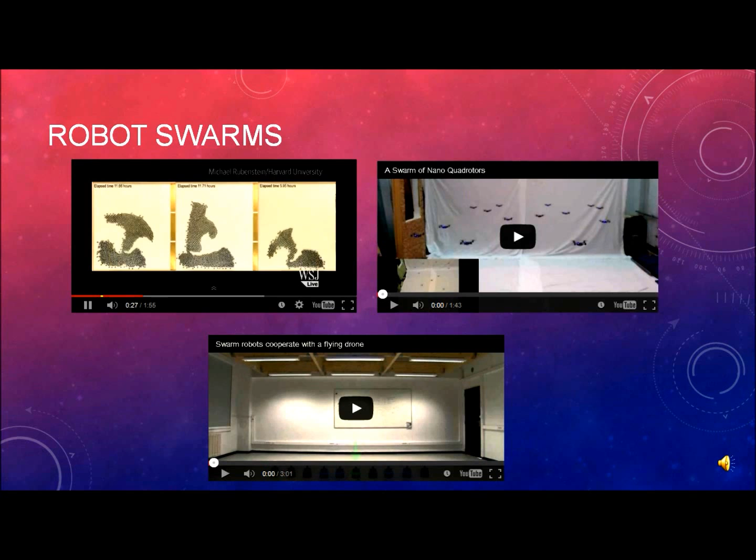Working together, these robots can assemble themselves into stars, letters of the alphabet, and other complex designs. The researchers at Harvard's Wyss Institute for Biologically Inspired Engineering reported their work Thursday in Science. It is the latest innovation in the science of swarms.

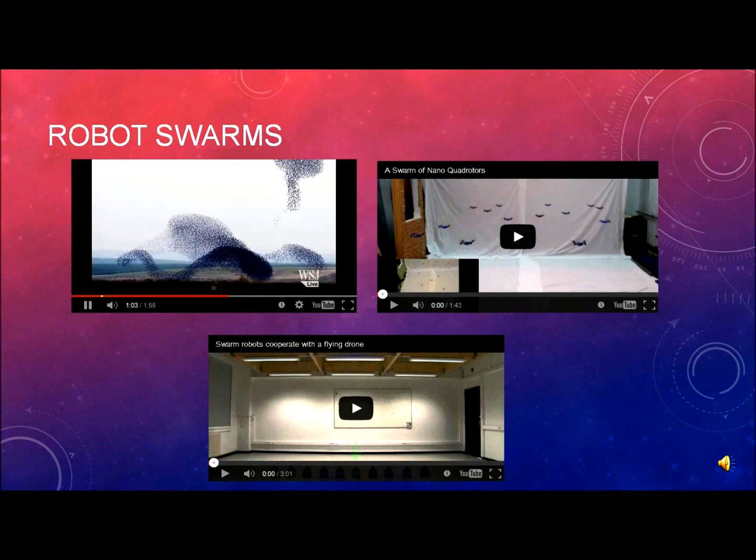Swarm scientists are inspired by nature's team players: social insects like bees, ants, and termites, schools of fish, and flocks of birds. These creatures all collaborate in vast numbers to perform complicated tasks, even though no one of them is actually in charge. To give robots that kind of hive intelligence, the researchers resorted to fundamental guidelines encoded in software to guide the collective behavior.

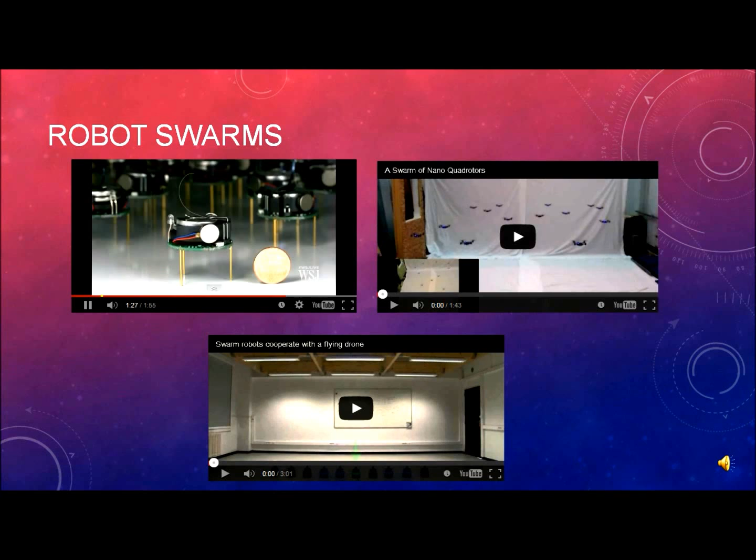In the Harvard experiment, the researchers used inexpensive, off-the-shelf robots called kilobots. Each one is about the diameter of a penny. It has one infrared sensor and a simple vibration motor to move it along. Each of these robots knows three things: how to follow the edge of a group, how to track its distance from where it has started, and how to maintain a sense of its relative position.

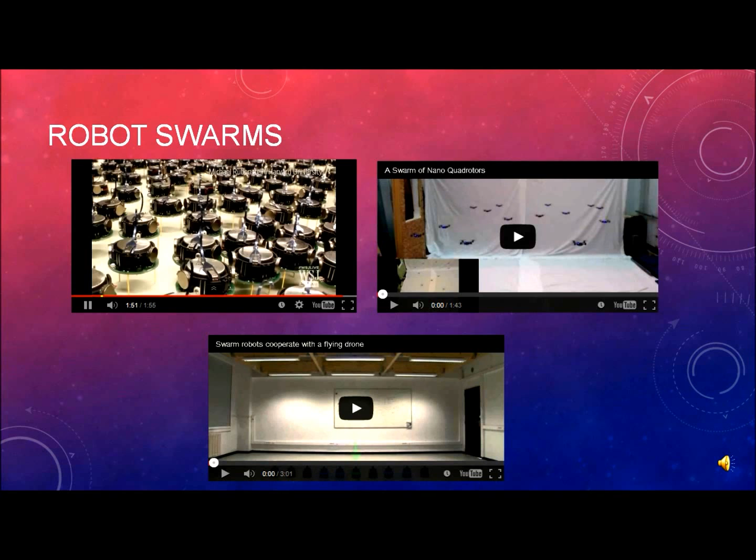While still experimental, such big robot swarms one day may aid in oil spill cleanups, deep-sea ventures, military surveillance, and planetary exploration.

We developed a nano-quadrotor capable of agile flight.

Multiple vehicles can fly as a formation.

We developed a method to transition between formations in 3D.

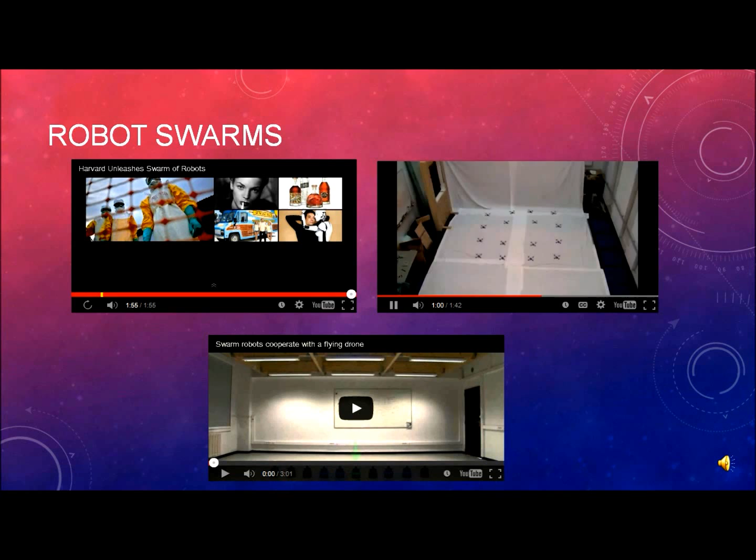The team can also navigate in environments with obstacles.

A recent trend in robotics is to get lots of robots working together. But parallel operation is not always enough. Some tasks are just too difficult for the robots to solve on their own.

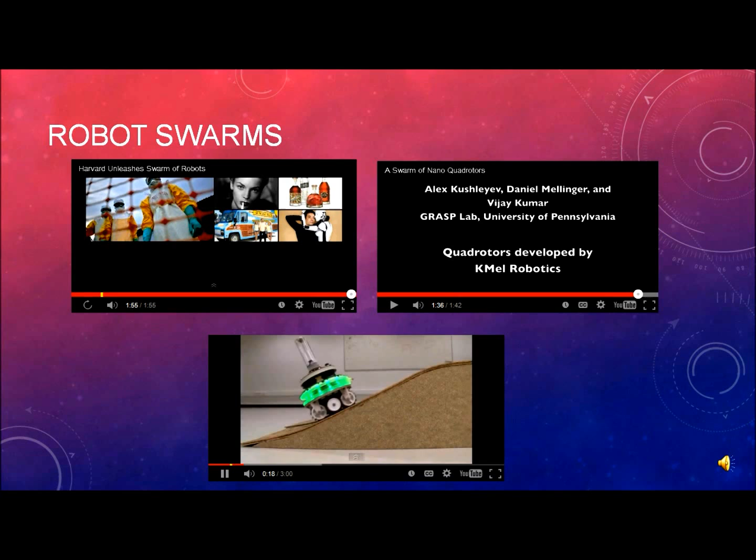So-called self-assembling robots can combine forces by connecting to each other in a broad range of morphologies. But it's hard for the robots to know when to use different morphologies because of their limited local sensing range. The solution? Flying robots.

Flying robots can analyse the environment to see what task needs to be solved, what morphology is most appropriate to solve that task, and which robots are best placed to form the morphology.

However, it is non-trivial for the flying robot to communicate with specific robots on the ground. The problem is that the robots have very different views of the world, which makes it difficult for them to agree on a common frame of reference.

We have developed a method that allows robots to select their communication partners without relying on any kind of global coordinate system. We refer to our method as spatially targeted communication.

Let's say a flying robot wants to communicate with a specific robot on the ground—this one, for instance. To start the selection process, the flying robot illuminates its red LEDs. To join the selection process, the robots on the ground light up in blue.

In a series of elimination steps, each ground-based robot independently displays a sequence of randomly selected colours. At each step, the flying robot matches the colour of the target robot. Whenever a robot on the ground sees that its own colour doesn't match the flying robot's colour, it eliminates itself. The process continues until only the targeted robot is left.

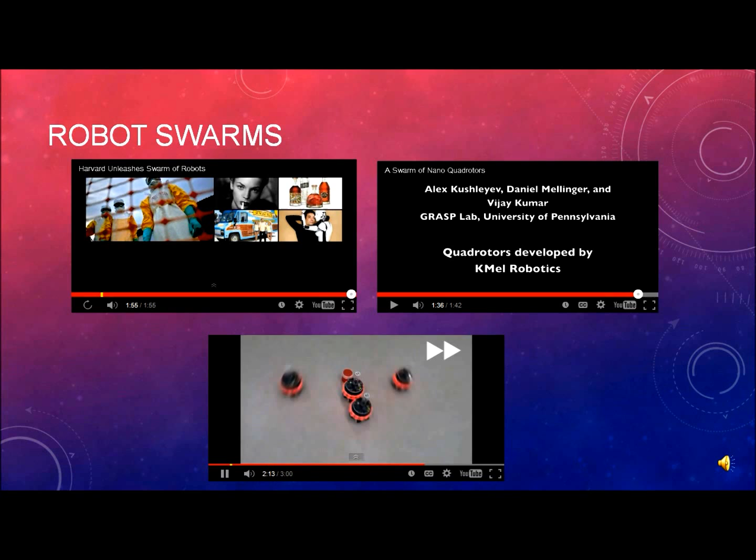Here, the flying robot has already targeted the 4 robots closest to the hill and instructed them to form a line morphology.

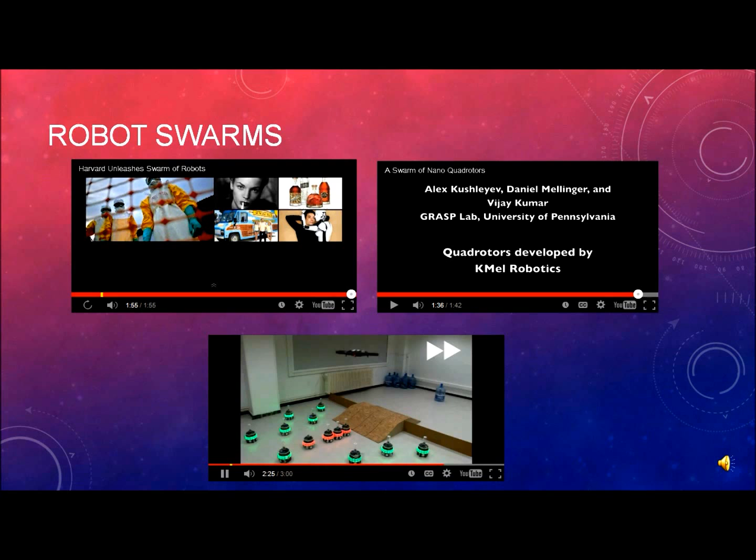Spatially targeted communication expands the potential of self-assembling systems by allowing ground-based robots to benefit from cooperation with flying robots. Any robotic platform equipped with LEDs and a standard camera can participate in spatially targeted communication. Our current focus is on bringing our research out of the laboratory and into the real world.

In the following example will be a demonstration of telerobotic surgery using an existing industrial-strength robotic manipulator. Within the area of telerobotic surgery, many applications are possible, both for performing via a very skilled surgeon and thousands of miles between the operating table and the surgeon.

Procedures within the area of orthopedic surgery, as an example, and there are also new emerging applications within the battlefield, where skilled doctors would be staying hundreds if not thousands of miles away from the battlefield, and actual robots with the appropriate sensors, manipulators, and end effectors are performing via telerobotics using the skilled surgeons' techniques, surgeries on wounded soldiers, as an example.

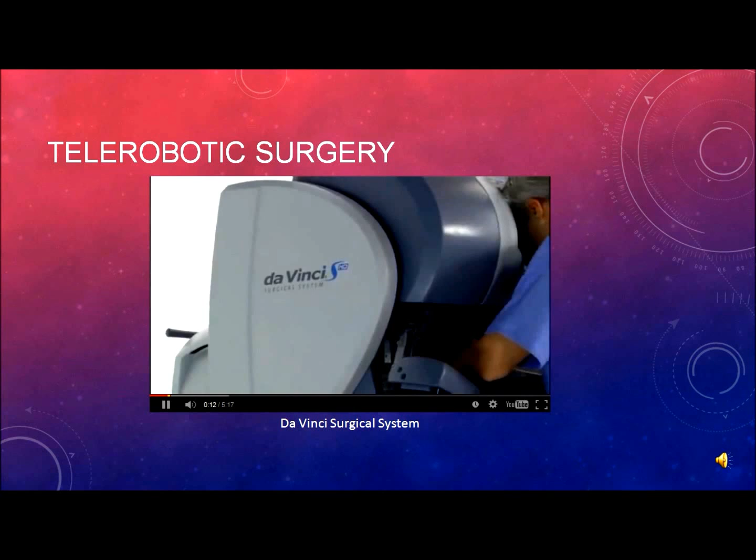The Da Vinci surgical system is the most advanced platform for minimally invasive surgery available in the world today. The integration of high-resolution 3D vision, wristed instruments, and intuitive motion control enable the Da Vinci surgeon to transcend the limitations of conventional surgical technologies, making new minimally invasive options possible for complex surgical procedures.

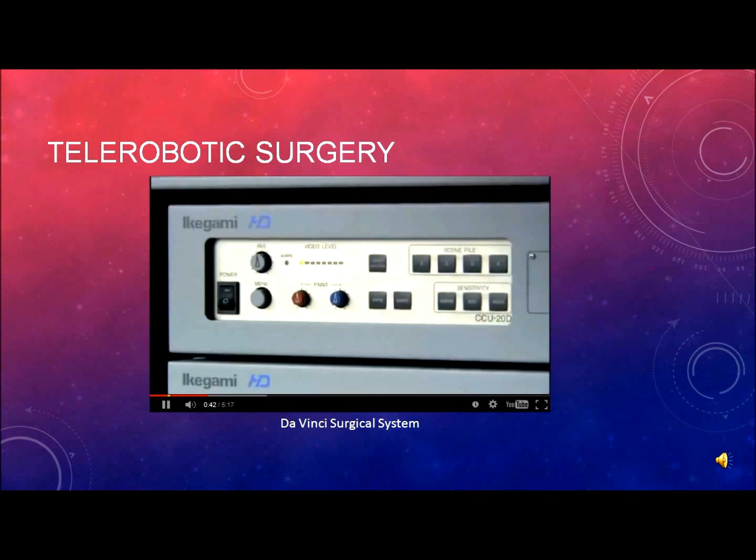Three network components comprise the Da Vinci surgical system: an ergonomic surgeon's console, a patient-side cart with 4 interactive robotic arms, and a high-definition 3D vision system.

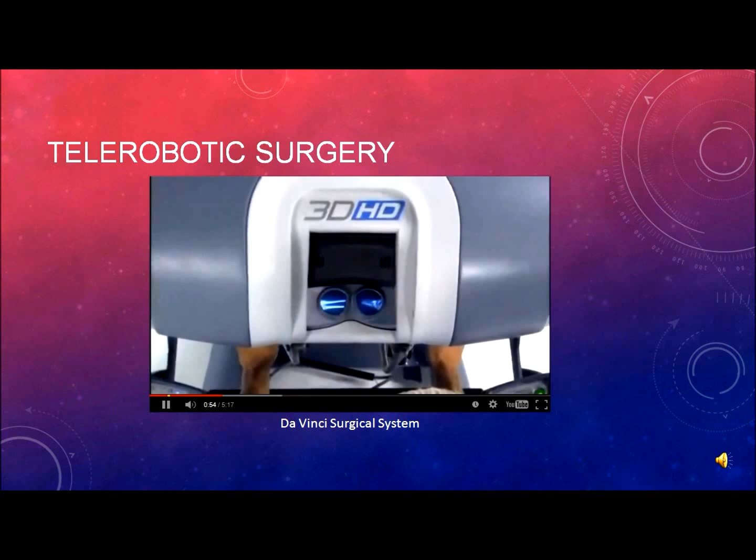Seated at the console, the Da Vinci surgeon views a remarkably clear 3D image of the surgical field. The system scales, filters, and translates the movements of the surgeon's hands on the master controllers to 4 interactive robotic arms on the patient cart.

The DaVinci S HD system provides a magnified view that is both three-dimensional and high definition. The result is a phenomenal immersive experience of surgery.

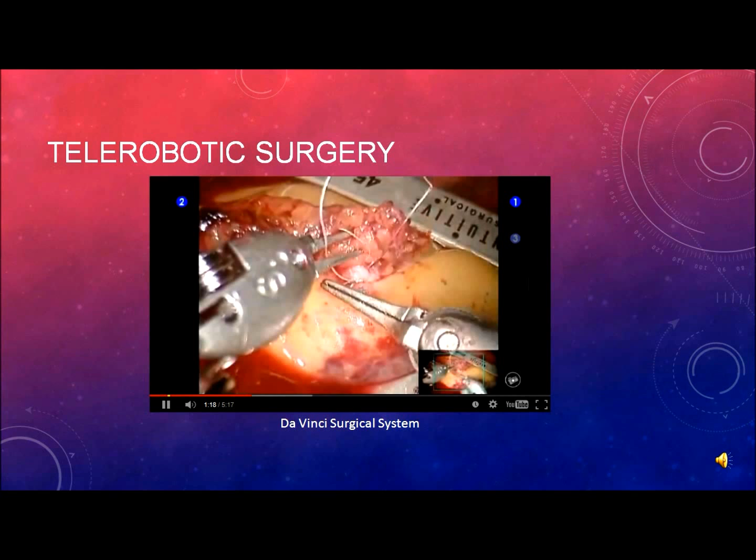The precisely controlled micro-movements of the DaVinci instruments are enabled by the computer processors of the system. These dedicated processors perform millions of safety checks over the course of a procedure for enhanced surgical precision and control.

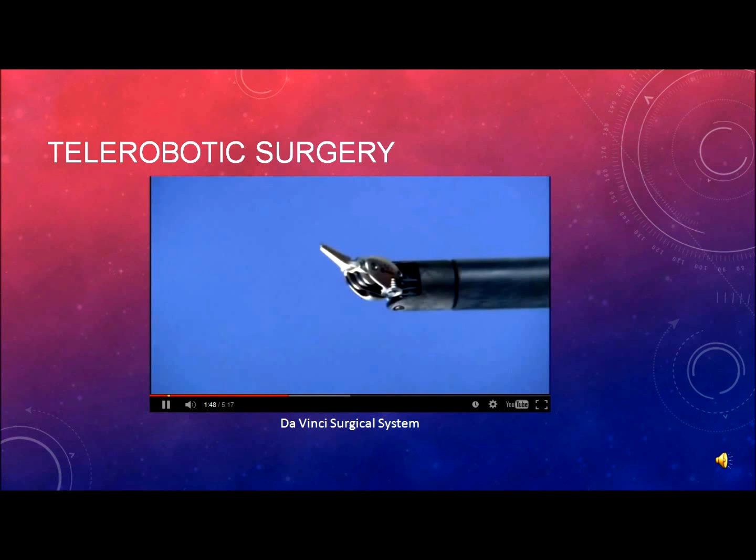DaVinci EndoWrist instruments are designed with a unique wristed architecture that provides 7 degrees of freedom for a range of motion greater than even the human wrist. This proprietary design enables surgical maneuvers impossible with conventional laparoscopic tools.

As the surgeon operates at the console, the DaVinci system filters out hand tremor and translates his controlling motions to the articulating tips of the EndoWrist instruments. The DaVinci system also provides motion scaling that enables the surgeon to tailor the ratio of his hand movements to a corresponding micro movement at the instrument tip.

The system requires that every surgical maneuver is under the direct control of the surgeon. Redundant safety checks prevent autonomous movement of the instruments or the robotic arms.

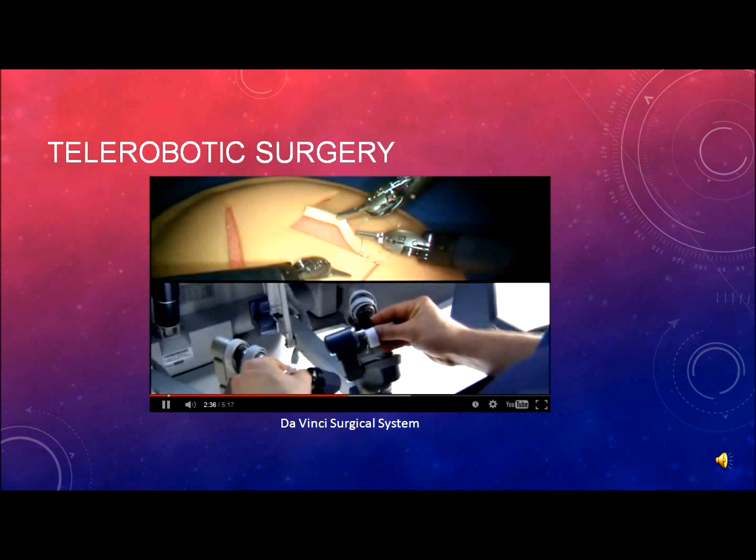The DaVinci S surgical system adds to the enabling characteristics of the original DaVinci to streamline surgery for the entire OR team. DaVinci S provides fast, foolproof setup, including a motorized patient cart for simplified docking, simple click-lock cannulas, rapid instrument exchange, and an intuitive touchscreen interface.

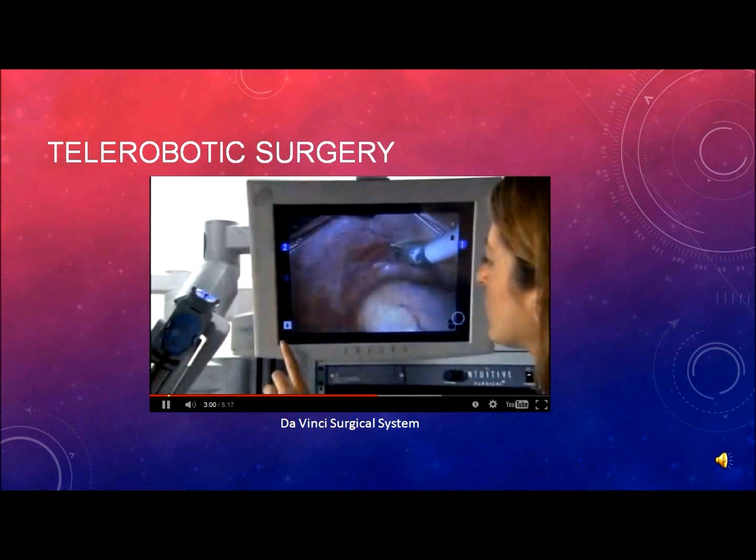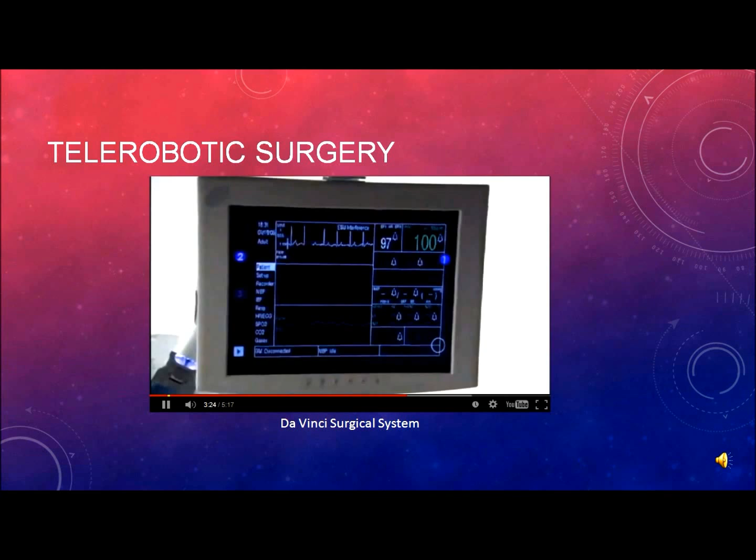Intraoperative communication between the entire OR team is enhanced with the audio-visual components of the system. The internal view of the operative field is visible on the vision cart or optional patient cart monitor. These monitors can also be toggled to display patient-critical information or a tiled display with multiple windows.

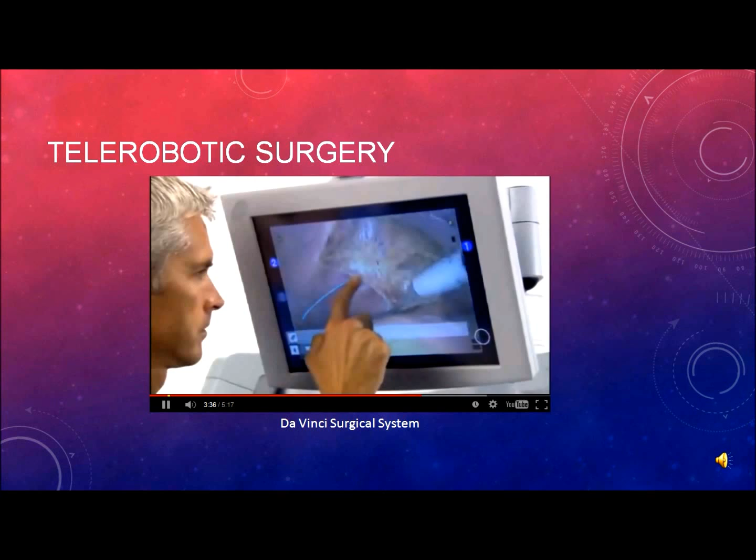Proctoring is enhanced with the telestration capability. Notations drawn on the patient cart monitor can be seen by the surgeon as an overlay on the surgical view at the console. The 2-channel endoscopic cameras of DaVinci S HD enable better 3D visualization of tissue planes and critical anatomy. The result is increased surgeon confidence and an environment that lends itself to greater surgical precision.

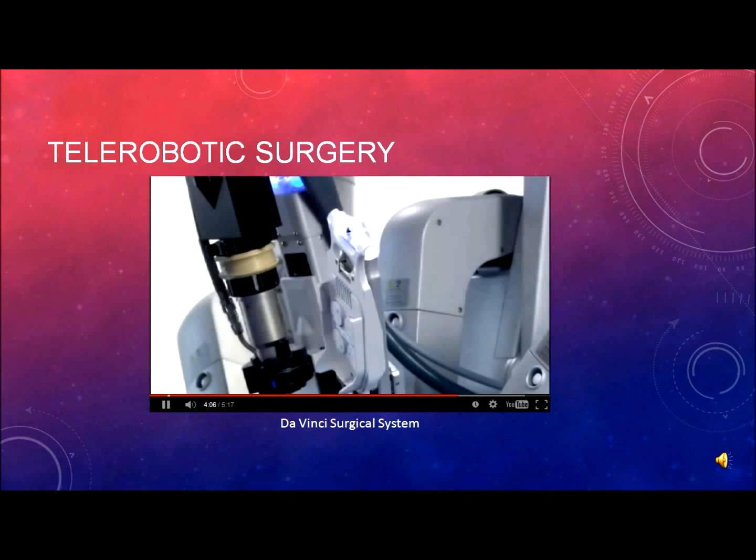LEDs that indicate status on each robotic arm, along with the user-friendly design of EndoWrist instruments, make intraoperative instrument exchange simple.

Like conventional laparoscopic surgery, the robotic arms move around a fixed pivot point to reduce port site trauma for improved cosmesis and increased overall precision.

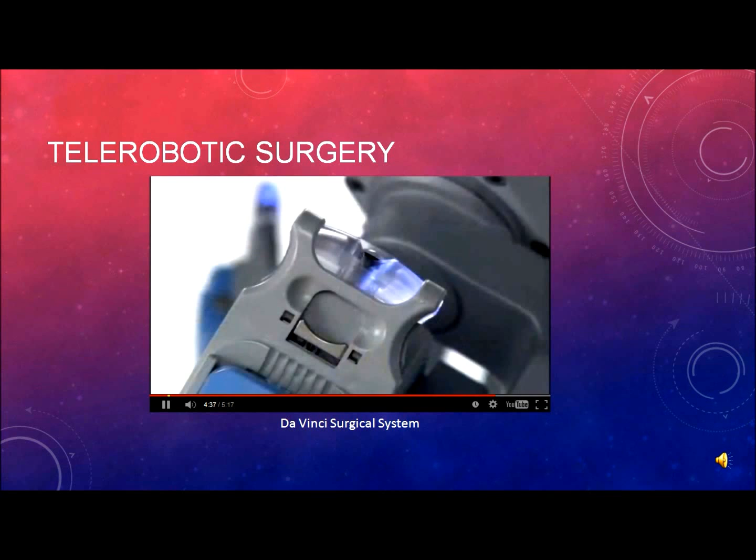The future of surgery includes enhanced visualization, superior instrument dexterity, and operative efficiency in a tightly integrated system. The DaVinci S surgical system moves surgery forward with a new level of technical capability that enables minimally invasive surgery in complex procedures as never before.

DaVinci provides a streamlined surgical experience that benefits the hospital, the surgeon, the OR team, and, most importantly, the patient.

The next set of two videos represent recent advances within the military arena. In particular, you will see a little dog robot developed at the University of Southern California, followed by the Big Dog overview, a very significant military robot developed by Boston Dynamics in Boston. Boston Dynamics, as some of you probably know, has recently been bought, among many other robotics companies, by Google.

These applications emphasize the military trend in many countries to develop ground, flying, and, in recent circumstances, underwater robotic agents and devices that would completely replace the need for soldiers within any kind of battlefield, whether on the ground, on the seas, or in the air.

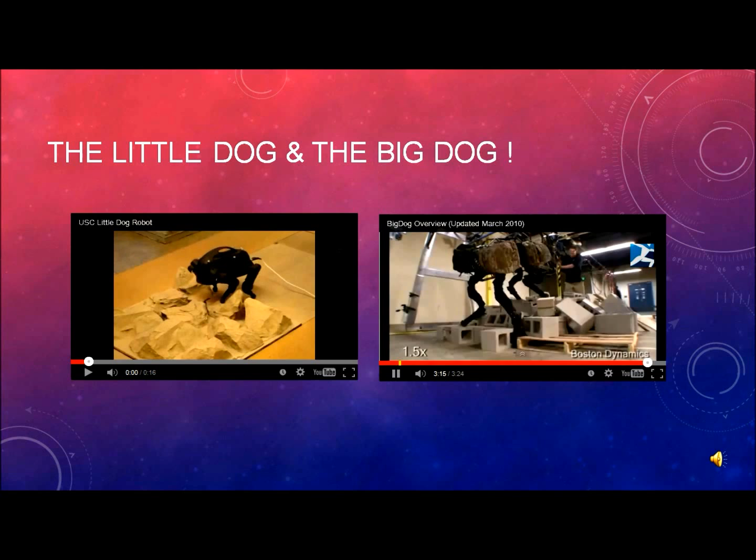The following two videos represent recent advances within the area of self-assembling, self-manufacturing, self-repairable robotics. One is for a snake that is being self-assembled, and the other is for a quadruped that is being self-assembled. The area of self-assembly and self-reproduction of robotics brings to mind the idea of being able to

create sustainable environments. These sustainable environments could be designed and manufactured in the future via 3D printing techniques, as an example. From a fantasy point of view, one can imagine a mother and father robot laying at night, and in the morning, once we come to the laboratory where the father and mother robots exist, you will see a whole self-sustainable environment with robots doing various tasks, repairing each other, and manufacturing new robots if the need arises.

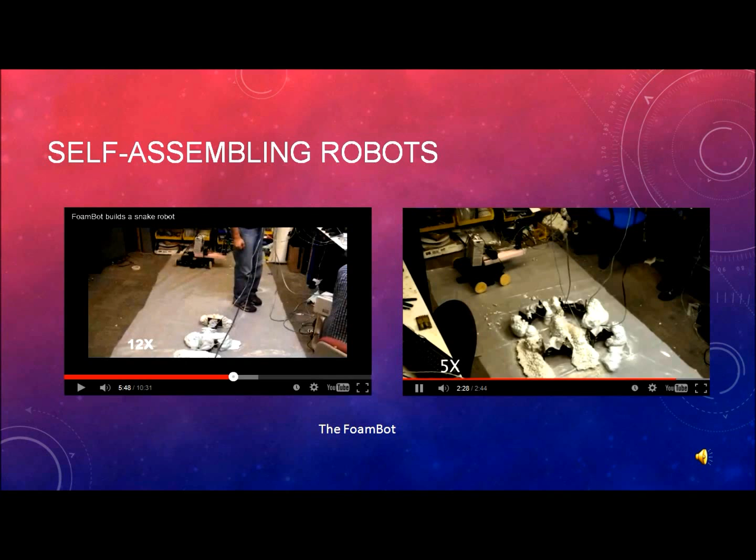The next example will show underwater robotics, and you will see the various degrees of freedom that this particular robot can demonstrate under the water with various types of movements. This is the beginning of the seed of trying to create self-maneuverable, autonomous, or tele-autonomous robots performing significant tasks under the sea.

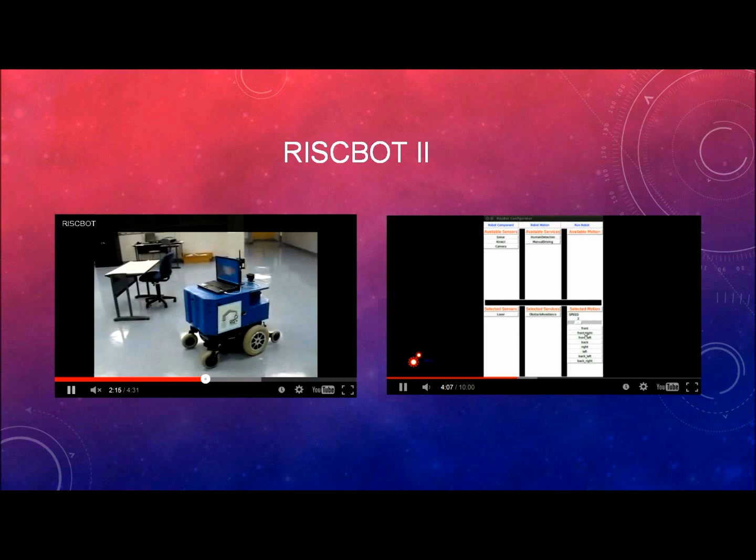Different sensory devices, actuation platforms and software services can be selected to demonstrate desirable and optimal behavior. This experiment demonstrates manually driving RISCBOT II. The robot can be controlled by a human to move in any direction at an initial speed factor of 2. The user can also make adjustments to the speed factor.

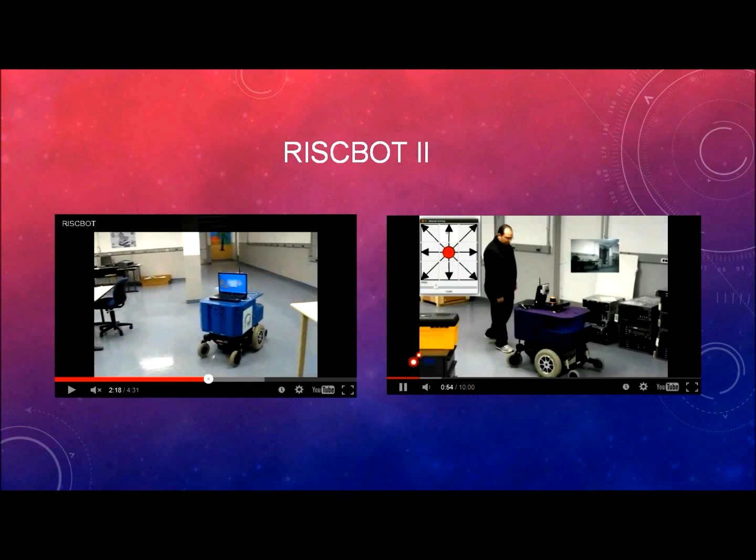This experiment is similar to experiment number 1. In addition to the manual robot control interface, a laser rangefinder is selected as a sensory module. From the video, it can be observed that the addition of the laser rangefinder does not impact the behavior of the robot.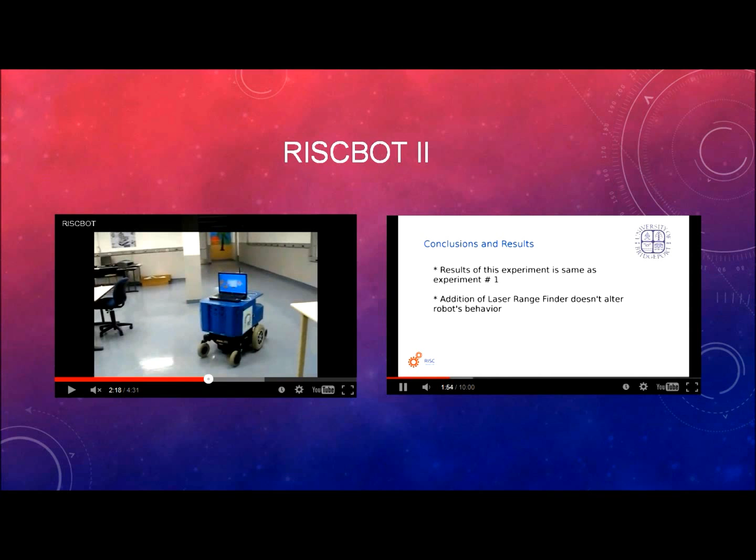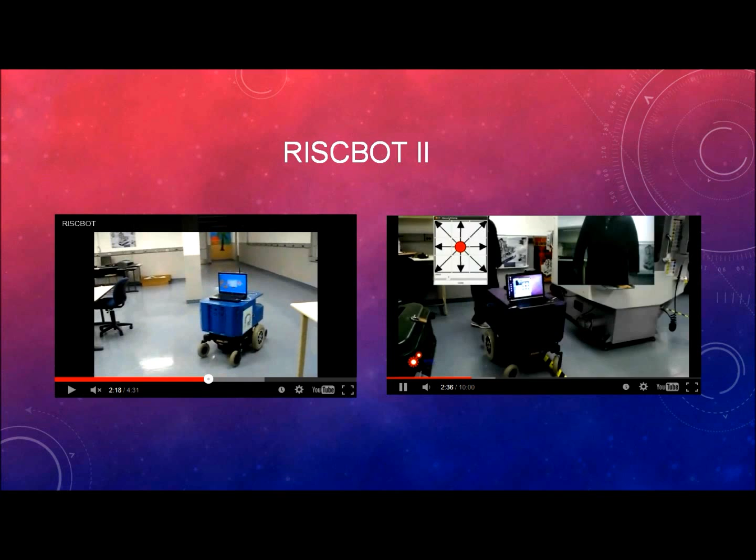In this experiment, RISC-Bot 2 is under semi-autonomous control. Like in the previous experiments, a user can still control the robot, but the user is assisted by a laser rangefinder. The laser rangefinder is capable of detecting obstacles at a height of 0.9 meters, and can use this information to navigate and avoid obstacles using a potential field algorithm. Also, a wireless camera is active on the robot, allowing a remote operator to effectively control RISC-Bot in difficult-to-navigate terrain.

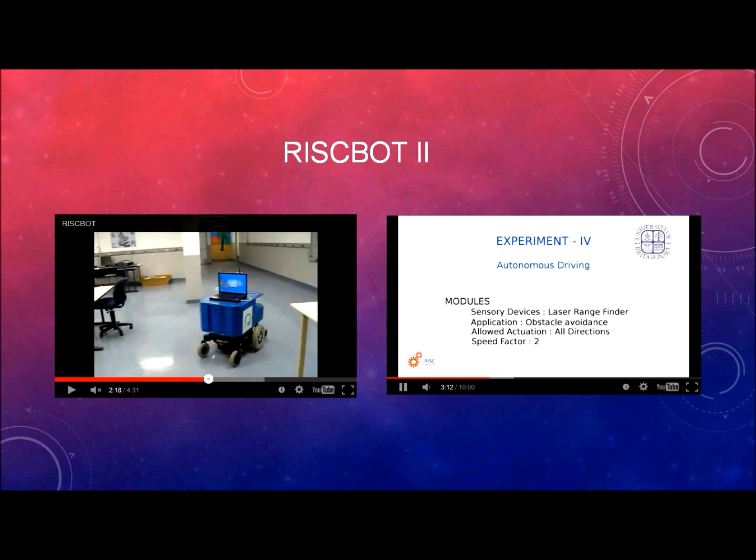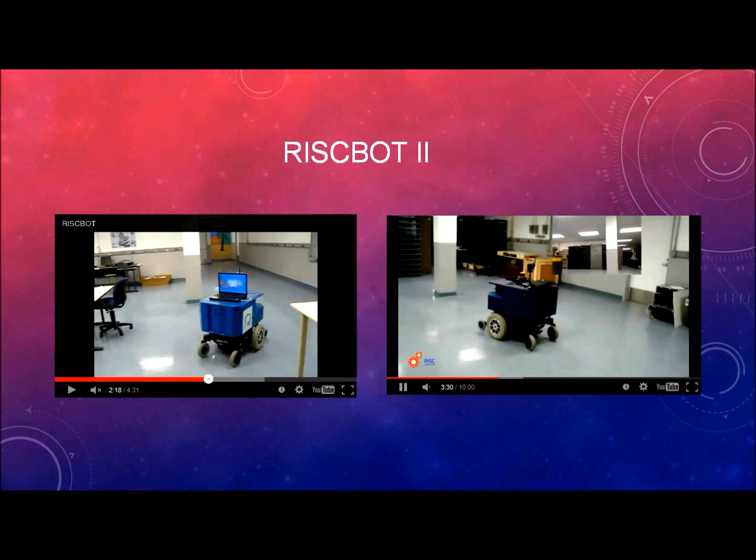RISC-Bot 2 is under complete autonomous control in this experiment. The laser rangefinder, capable of detecting obstacles at a height of 0.9 meters and at a distance of 6 meters, is used as the primary sensor for detecting obstacles. The robot avoids obstacles using a potential field algorithm. The speed factor has been set to 2, allowing the robot to be agile and to use all directions for obstacle avoidance.

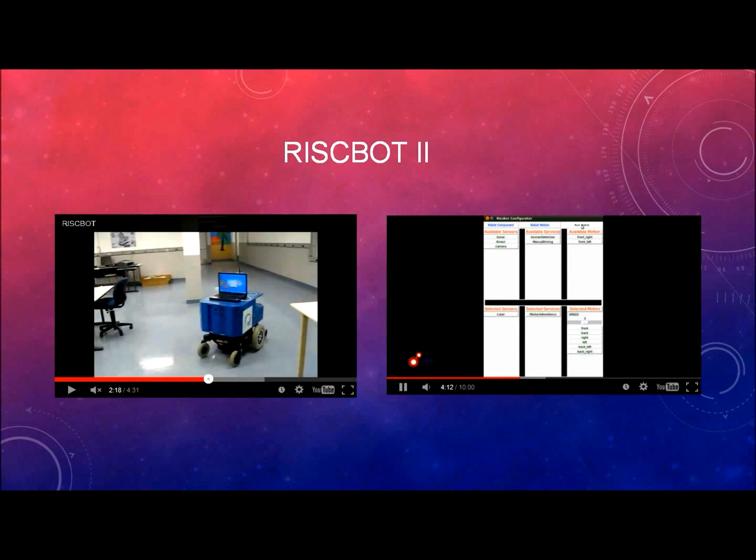Like the previous experiment, RISC-Bot 2 is under autonomous control in this experiment. The speed factor has been increased to 3, allowing the robot to cover much greater distance in short periods. Also, two directions, namely front left and front right, have been disabled. This is to demonstrate the configurability of the framework.

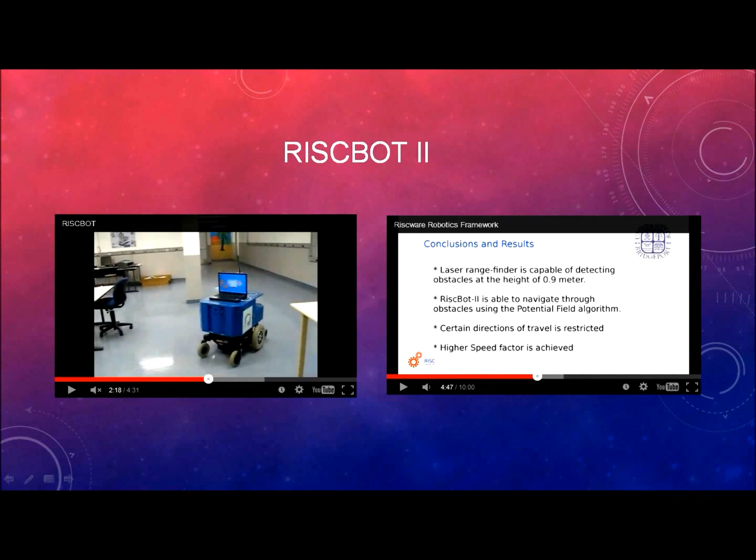The following project we discuss is a project about tire changing. In particular, some of our students were very interested in car racing, specifically the idea of changing tires at pit stops in Formula One car racing. It was noticed that the distribution of time and the race outcomes is very dependent on how fast and efficient this tire changing process takes place at the pit stops, and it's not uniquely a function of how skilled the driver is or how good the car is. Furthermore, it has been noticed that several accidents have actually happened at pit stops due to the speed by which the workers need to perform the tire changing process, thus the need to automate the process.

The solution that our engineers in the Robotics, Intelligent Sensing and Control Lab at the University of Bridgeport were able to come up with is a solution by which the pit stop is totally automated, with 4 upward hanging robotic manipulators that in tandem and synchronously replace the actual tires in an automated fashion whenever the driver stops at the pit stop. The following video will illustrate the process and a simulation of how this would be done at the pit stops.

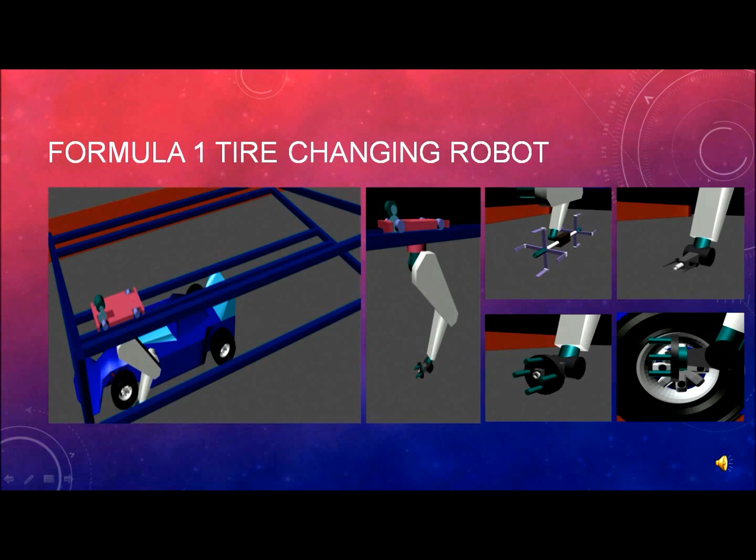One problem associated with car racing is the time difference between teams during pit stops, which substantially affects the final results. In addition, a high percentage of accidents is related to pit stop problems.

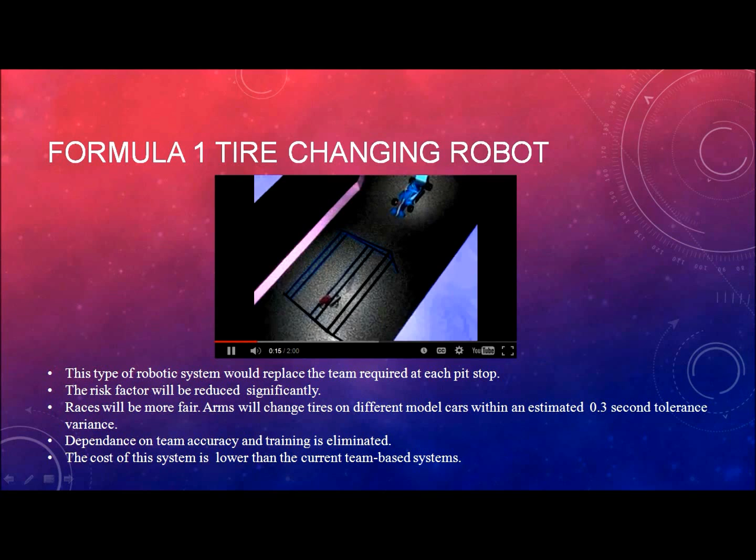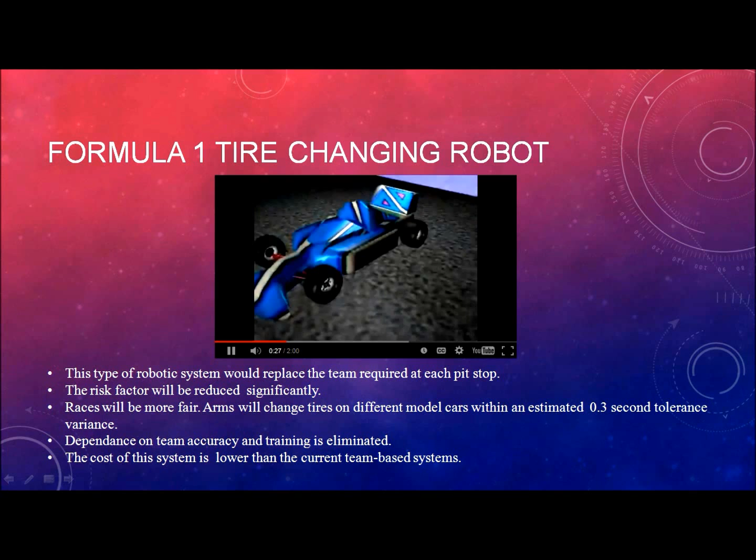Our idea is to build a fully robotized system that takes over the tire changing and refueling processes during races. There is practically no need for human intervention. The system demonstrates remarkable time accuracy, precision, low risk implications, and uniformity of performance across teams.

Our proposed robotic system consists of 5 manipulators, all similar to the one presented in this simulation, 1 arm for each tire and a 5th one for refueling.

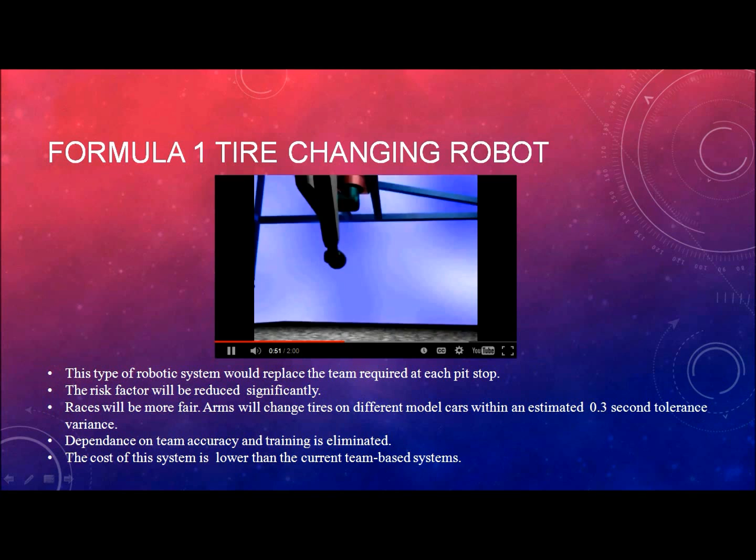To preserve the environment of the pit stop and assure the comfort of the team, we implement suspended manipulators. The support of the 5 arms allows the sliding motion of each arm and does not create any obstacles or driving difficulties for the pilot.

The support has 2 double longitudinal branches on which the arms will be suspended, 2 arms on one pair of branches and 3 on the other. Because the wheel of a Formula One car is attached with a single central screw to the body, there is design space for a flexible end effector with low required torque and mass.

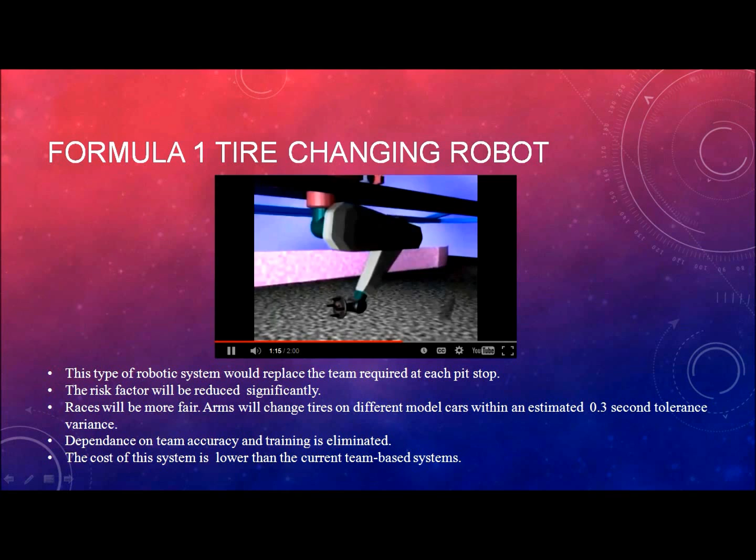By the time the car arrives, the robot sensor system registers it and notes the exact position and direction of the tires. Once the car reaches a full stop, the arms start the tire changing process. For lifting the car, a simple lifting system will be implemented and positioned on the stopping platform, which would suspend the car throughout the whole process.

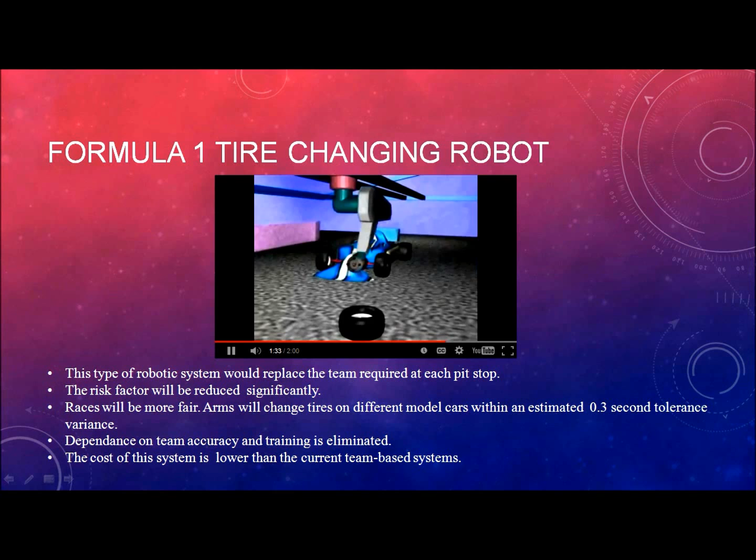Each tire handling manipulator has to go through the following task sequence: position the end effector as a function of the tire parameters received from the sensor system, rotate the end effector so it can catch the tire, grab the tire, remove the screw, remove the tire from its axis, and put it on the ground near the car in a convenient spot.

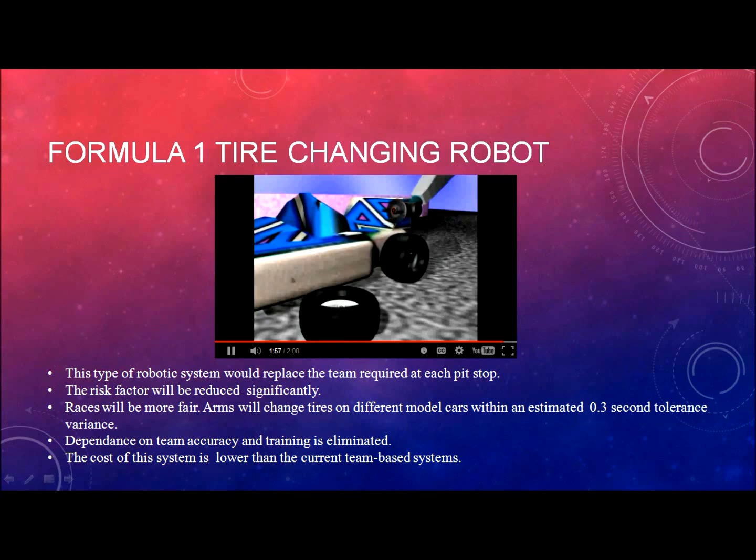Change the position and grab the new tire located in proximity with a new screw on it. Position again the end effector and fix the new tire on the axis, tighten the screw, and move back to the standby position to enable the car's departure.

The next project was initiated by the music department at the University of Bridgeport, and the purpose was to experiment with new types of tones and musical notes being produced not through humans and at the same time not digitally. In particular, there was intellectual interest in trying to see how classical devices could be either modified or used as is and played with several more degrees of freedom than a human would have.

So for example, imagine the possibility of playing the piano using a robotic device, a humanoid that has 30 fingers as opposed to 10 fingers as an example. The purpose of this project was to actually create a robotic musician band that performs on real instruments through the usage of mechanical devices such as servo motors and solenoids.

The research involved linking music, robotics, and computer science in a very interesting and comprehensive manner. Several of our engineers, working with our musicians, were actually able to perform this and create several interesting performances for live audiences using our robotic band.

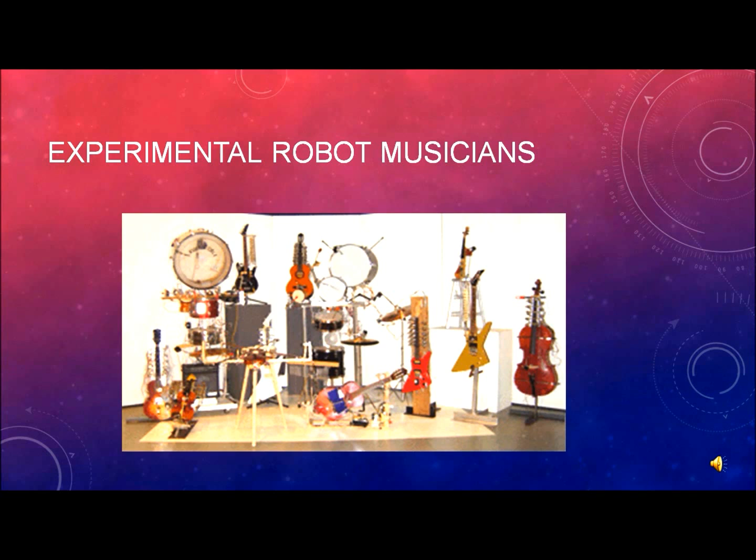The following set of slides describe an ongoing project at the Robotics Lab, namely the design and prototyping of robotic manipulators based on task descriptions. In particular, our engineers are very interested in designing manipulators based on user-defined tasks and operating constraints. Thus, whatever is to be created and prototyped in terms of a robotic manipulator would be quote-unquote perfect for the particular task.

The work involves lots of interesting new developments within the areas of workspace design and reconfiguration of the robotic based on the workspace descriptions, in addition to the various kinematics, inverse kinematics, dynamics, and trajectory generation required to perform a task.

The project started by trying to optimize the parameters for manipulability. So the first phase of the project was designed to find the best manipulability envelopes for performing certain tasks, and based on these manipulability envelopes, try to design and come up with the D-H parameter table in addition to potential dynamic parameters that would make the particular manipulability requirements at particular points within the trajectory be performed optimally, and then come up with the appropriate design of manipulators with several degrees of freedom that can do the task in the most efficient and optimal manner.

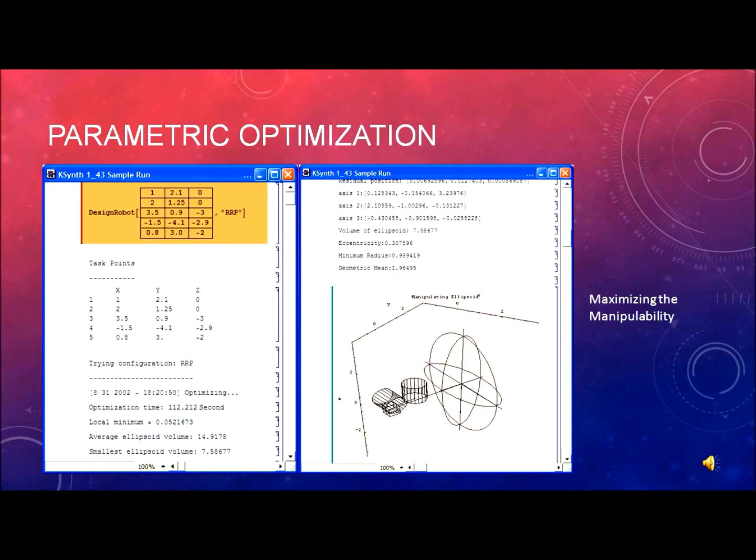The following two examples show how a manipulator is to be designed for both a spherical goal task manipulability requirement and a ring goal task manipulability requirement. The video shows, based on the requirements for the optimization of how to perform the task, what would be the correct manipulator to do the task in the most efficient manner.

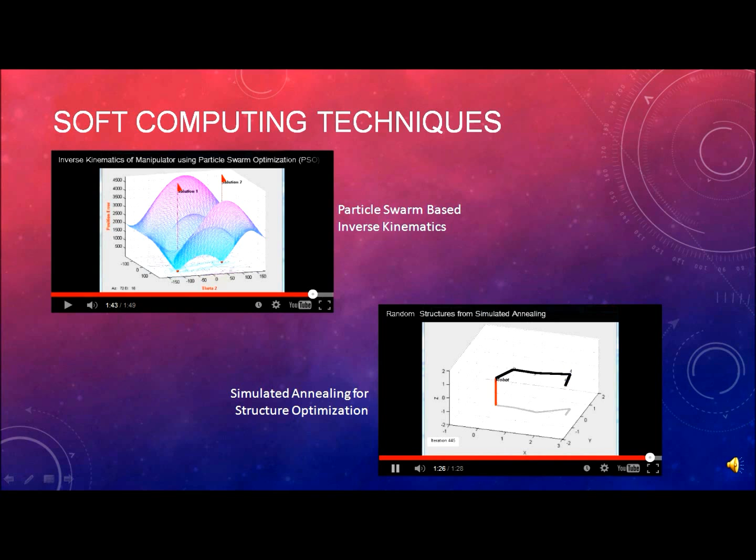In the next two projects, you will see examples of work performed by these heterogeneous robotic swarm systems utilizing the many sensors on them, in addition to the manipulators and actuators that exist. In this heterogeneous robotic swarm, we use a whole set of suites on each one of them, including stereo vision, infrared sensors, ultrasonic sensors, laser rangefinders, and others.

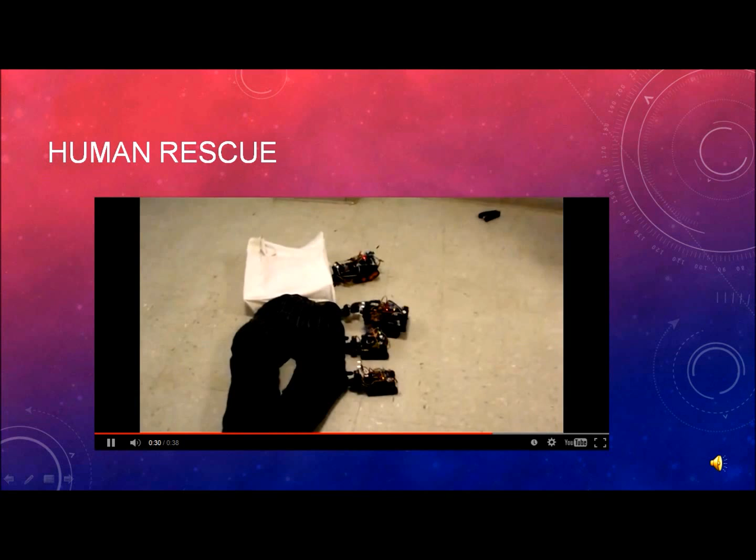In conclusion, I hope that you enjoyed the set of projects and ideas presented in this work, and I look very much forward to collaborating with many of the audience listening to this presentation. We look forward also to having several interested students, both at the undergraduate and graduate level, join some of our research endeavors at the University of Bridgeport.